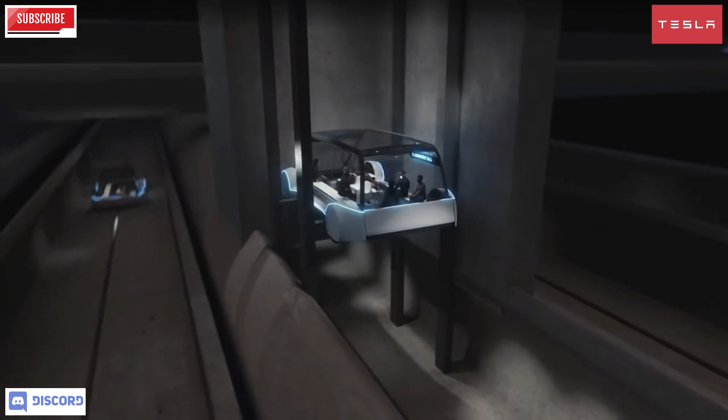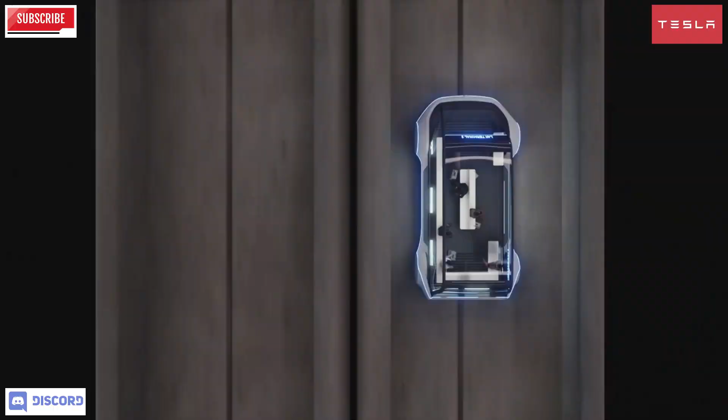I'm coming to you today with an episode exploring a particular project that has been proposed. That project is the Boca Chica Diversion Tunnel. So it's allowing access for people who live in this area and potentially people who are visiting this area to get to the beach. Potentially maybe they're going there to view the SpaceX launches. So it has been proposed. I think Elon Musk has talked about potentially doing this in the past, but I thought that now that it's getting a little bit more serious, it's about time we explored this particular project.

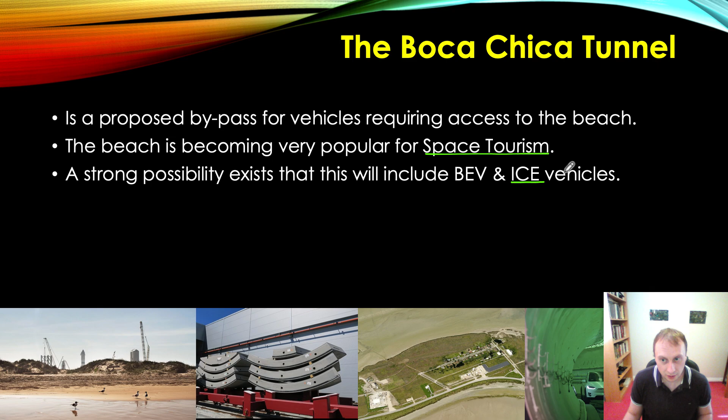So that's kind of like a reasonable business case for building this particular tunnel. At this moment in time, there might only be several hundred people that are going to access the beach, so it doesn't really make a lot of sense. But in the future, obviously with space tourism, there could be a good business case for this. And I'd imagine that you'd probably charge a toll of around $10 to $15 per use of the tunnel. A strong possibility exists that this will include battery electric vehicles and ICE vehicles. That is a major concern for me because no one has said this is only for BEVs.

I'm guessing, because it's focused on the local population and people in nearby towns and cities, they're going to be using ICE vehicles in this tunnel. That causes some major headaches in terms of how this tunnel operates. Its overall capacity is going to be limited because there's ICE vehicles. You're obviously going to have to spend a bit more money on your ventilation system. You're going to have to think about how a vehicle is going to exit this system. What is the ideal speed limit?

What are going to be the gaps that you want in between vehicles? Any kind of curves are going to have to be quite gentle so that you've got a clear line of sight throughout the whole length of the tunnel. Lighting is going to have to be really good as well. So the current LVCC, Las Vegas Convention Center tunnel design won't work in Boca Chica. It's just not going to function properly, because that is focused on essentially a mass transit system.

This is not a mass transit system to begin with. It's going to be a diversion tunnel for existing vehicles, so you're going to have to design it accordingly. You need to focus on what are the risks here and how do you eliminate or severely mitigate those particular risks. So another thing worth considering as well, which is probably for me a bigger concern than the actual safety aspects, is building this tunnel could be very, very problematic.

The ground conditions in this area, the fact that you're essentially surrounded by water, low-lying water on both sides, is very concerning for me. So it's going to be very loose ground, possibly non-cohesive ground, very high water table. The fact that it's got a very high water table means you're going to be really limited to the speeds that you can achieve with the TBM. And also you're going to be pumping out a lot of water. Where are you going to put that water?

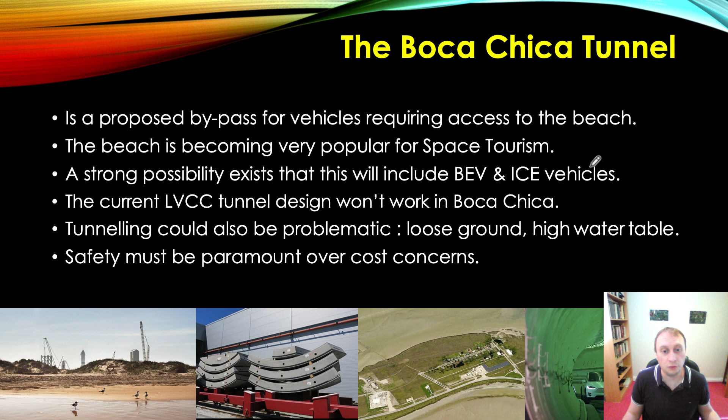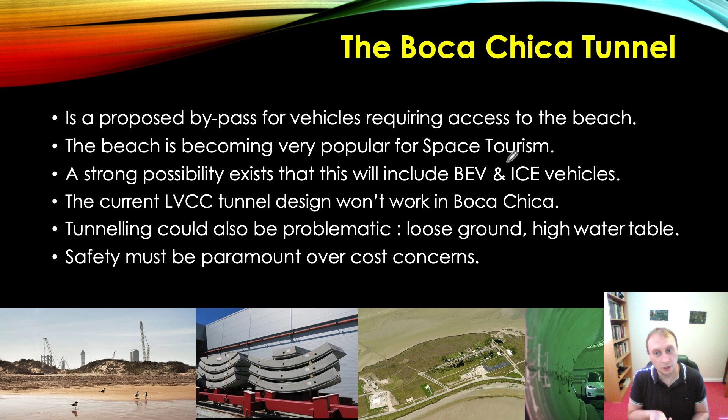It's a very, very problematic setup. I personally feel very nervous about it. I'd much rather this system was limited to just Tesla vehicles using autopilot, but that's just not how it's going to play out the way I've read this. So those are my concerns.

What is the route going to be? It looks like this. As you can see, there is a very, very large body of water on this side. There's also low-lying water in this area here. And you've got the sea here. There's just water everywhere, very high water table. Not much room for putting things alongside your route. In terms of the radius of the curve, it's fairly gentle, it's good.

This part at the end, you're probably going to need to have it curve out like this, and then you're going to have a ramp somewhere along here. That doesn't necessarily need to be a tunnel. You could have some kind of cut and cover system, but it'd only be around 150 meters long if you wanted to do that. Otherwise, you could just have a ramp, like how I've done it here. I've just had a ramp here, 1 in 6 gradient ramp.

So this is the SpaceX launch facility here. This is what is causing problems for the local residents. Obviously, it gets very, very noisy, and there's potential for explosions when things are being launched by Starship. So, as this ramps up, and you're having maybe 2 to 3 launches per day, potentially a lot more than that, it becomes even more apparent that you will need some kind of access tunnel for the beach, unless you just want to shut the beach off permanently, which would be unfortunate, but that's another possibility

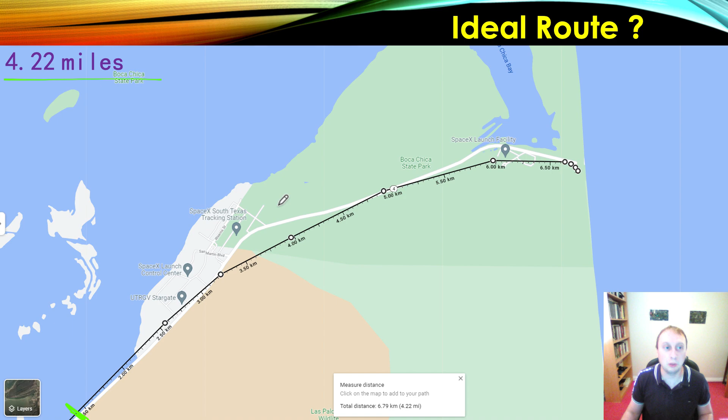rather than spending all this money. It's 4.22 miles in length. Potentially you could shorten it to around 2.8 miles if you just had it start here, but it's going to be difficult to do that. Plus, if you want to do this properly, you want it to start all the way down at the bottom. Let me just show you that.

But this road is Boca Chica Boulevard. This is the road that gets closed down fairly often when there are launches. Obviously, launches get cancelled, so they close it down for 4 hours and then they reopen it for no reason. So it's super frustrating. If you had a tunnel there, I could see how that would make people's lives a little bit more convenient. But you need to think about safety first.

Here's the finished route. That's 4.22 miles. So you start here and you end here. Reasonably straight. It's going to be easy for people to just drive along there. There's not going to be much turning of the wheel. You're going to put rumble strips alongside the road deck just to make sure people stay focused.

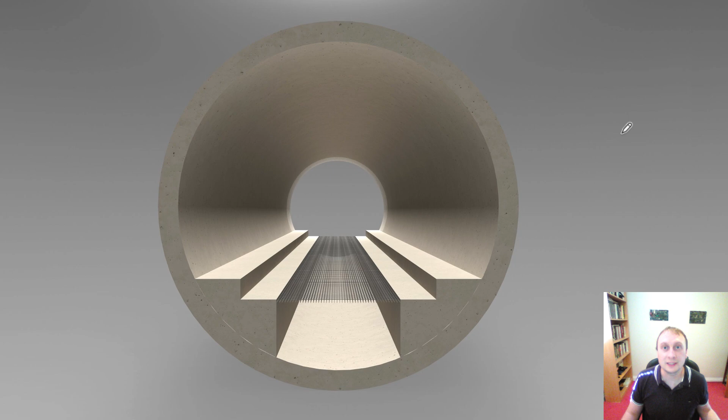But you're going to have a 20-second gap in between vehicles, potentially slightly less than that, maybe an 18-second gap, but there's going to have to be some kind of sizable gap just to ensure safety, and people are going to have to be fixed at 50 miles per hour, 55 miles per hour.

This is an illustration that was originally proposed for the Boring Company. So they have these kind of shelves. I think borrowing some ideas from this system would be useful. As you can see, there's a massive amount of wastage under here. This is where we're going to put our ventilation system. This is going to be pushing air into the system. It's not going to be pulling air out.

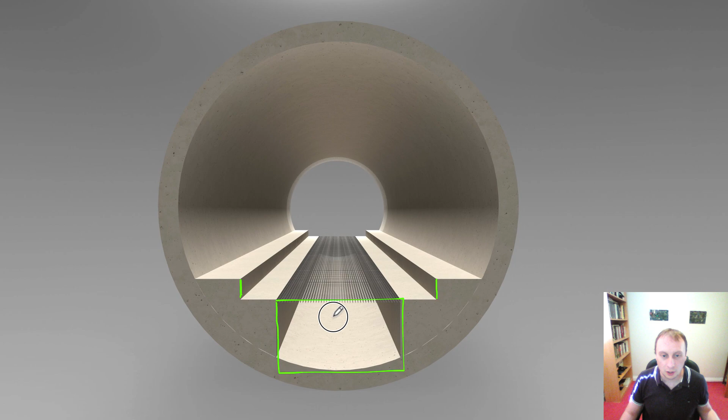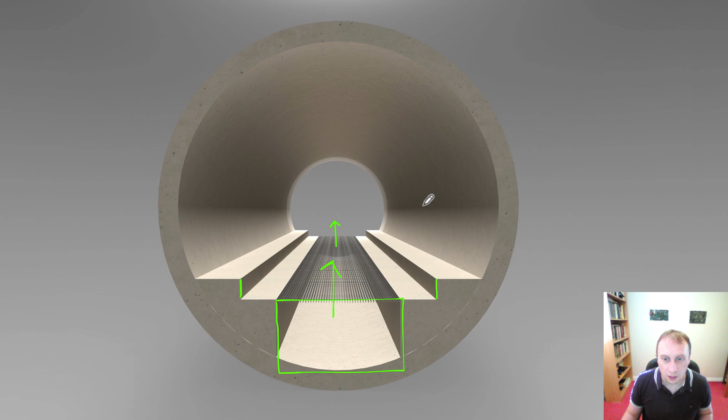So air is going to be coming up every 4 or 5 meters. Very small slots in the road deck, maybe 20 mil wide by 60 mil long, and then you're going to be injecting them at very high velocities. But this road deck here is just not wide enough, so I've designed it in a completely different way. So this is the kind of design that I think would ensure great safety. You've got emergency lighting 24/7. The road deck itself is 1.2 meters or 1,200 millimeters deep.

That is insanely deep, but it allows us to make the road deck really wide, just over 10 foot wide. As you see, it's made of reinforced concrete. We've got our buffers here, which are 500 millimeters tall. What that does is it prevents vehicles barreling into the side of the tunnel and rolling over. They don't have to be perfectly straight, they could be slightly angled if you want to do it as such, but I recommend doing it at 90 degrees.

You're going to have a sprinkler main as well, which is this over here, and a 14mm rumble strip, which is this here. So you're going to have rumble strips in this area here. Again, you probably will never use that sprinkler system, but it's worth putting it in just as a safety, especially if you've got ICE vehicles in the system. And also, there potentially could be battery fires as well, but that's going to be so rare, it might only happen every 20-30 years. But these buffers that run alongside are very, very important to make this system safe for ICE vehicles and vehicles that don't use autopilot.

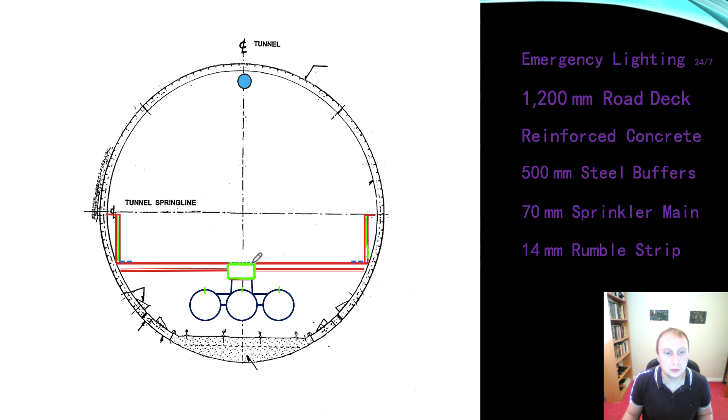The ventilation system is below the road deck, so different parts of the tunnel will be fed by different ductwork. Some of this ductwork will be basically pushing air down for a good half a mile before it then connects up to the main output piece, as it were, which is here. That allows you to keep the velocities quite high throughout the length of the tunnel, and then this can also be connected at the ramp areas, which you have 4 of along the route.

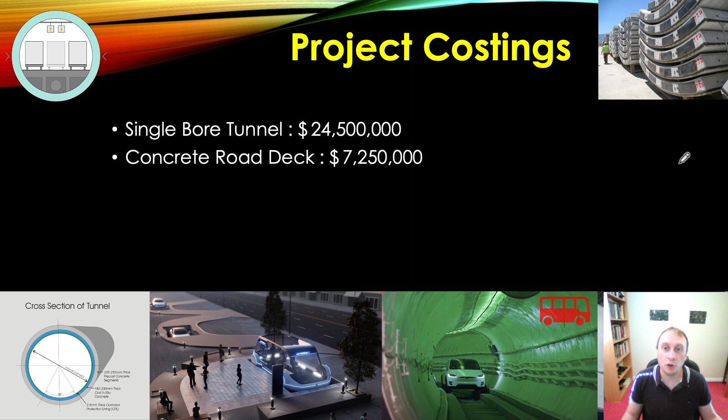So project costings, how much is this actually going to cost? Well, it costs a lot. It's going to cost a lot because you're going to have to incorporate a lot more safety features, and the road deck itself is going to have to be a lot deeper, which is also going to add to the cost. So just to give you a ballpark, I have done a previous costing of this on my quarterly report, and thinking about it, if they're going to have ICE vehicles in it, it's going to have to be a lot more. So this is kind of a revision if you're wondering why I've suddenly increased my costs.

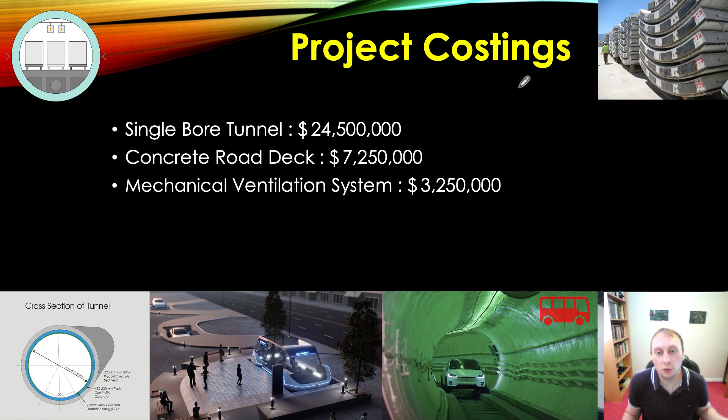So single bore tunnel for 4.22 miles is going to be 24.5 million. The actual concrete road deck is going to cost 7.25 million. Introducing a very powerful mechanical ventilation system, which you're going to have to introduce because of the build-up of fumes in this tunnel if you've got ICE vehicles, is going to be 3.25 million. Sprinkler system, very important. I suggest that they introduce this on all systems, no matter what vehicles they intend to use. That'll be 2.2 million. Rampways, so both the entrance and exit ramps, and then the emergency ramps. Altogether, that's going to cost just under 7 million.

The total cost, $44.15 million. Now, that's small change for The Boring Company. I suspect they can make that money back by charging a toll of around $10 to $15. But it's a big hefty price, certainly is. But you've got to account for all the safety systems that you're going to have to include in addition, plus all the extra costs to make the concrete road deck suitable for people to drive on it normally without the use of autopilot.

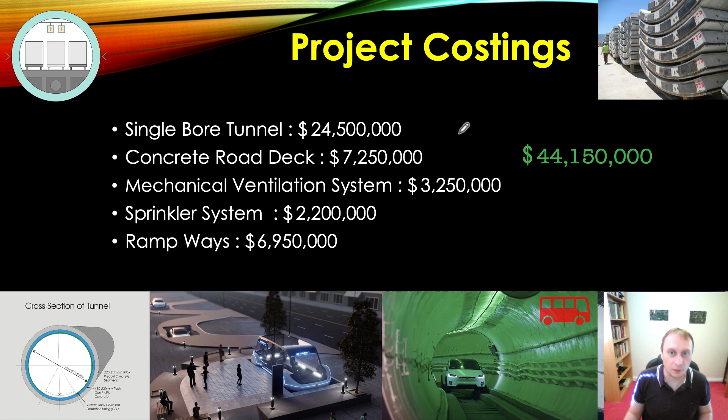I'm kind of 50-50 on whether it should be built. I do obviously like to see new infrastructure being built, but it kind of seems like a bit of an overkill to me. But let me know what you think about it. I would prefer if they didn't let ICE vehicles into the system, because then you could reduce the cost considerably. But given that only around 5% of the US population has electric vehicles, I don't think that is viable at this present moment in time.